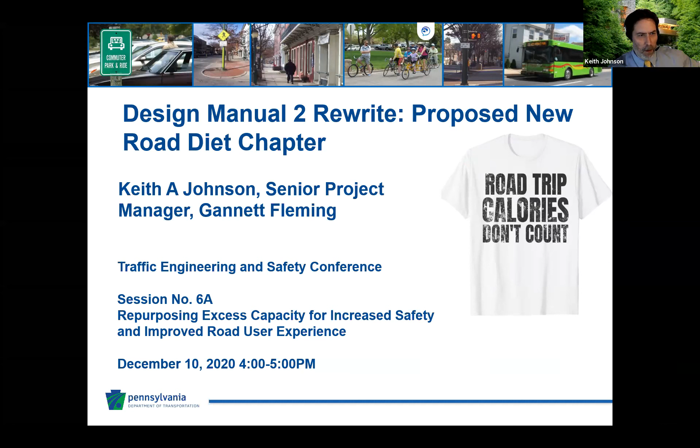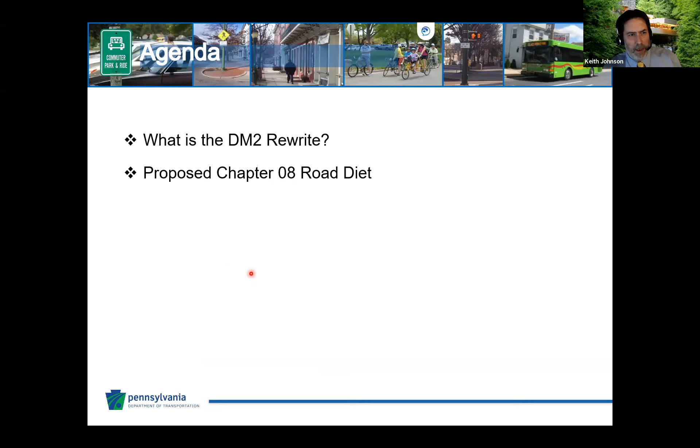My general agenda here for my presentation is, first I want to give you an idea of what the DM2 Rewrite is all about, and then I'll go over the aspects of the proposed new chapter with the road diet. I'll just forewarn anybody who was in the contextual session we had yesterday with Brian Shunk that this first part is going to be a slight regurgitation of what I went over yesterday, so if you want to hurry up and go get a drink for a couple minutes, my feelings won't be hurt here.

So first of all, what is the DM2 Rewrite? Most of you are probably working in Pennsylvania and know what the DM2 is all about. But for those of you that are from out of state and don't do much work in Pennsylvania, just to give you an idea, PennDOT has a manual. It is publication 13M, Design Manual Part 2.

We call it the DM2. This is the main design manual, highway design manual. It's probably the most used design manual of PennDOT's publications. What we are doing is a complete rewrite of the publication, not just an update, a rewrite of it. And as we do that, we will be putting that in what's called publication 13.

I talked a little bit about this yesterday, I'm sorry. 13M was created by PennDOT a few years ago, back when we were talking about converting over to metric, and that's where the M came from. So we had publication 13, and then we have publication 13M that has metric units in it. We didn't do that conversion, but we left the whole design manual in 13M, and we still theoretically have a publication 13. So we're going to just be putting the new chapters in there as we publish them.

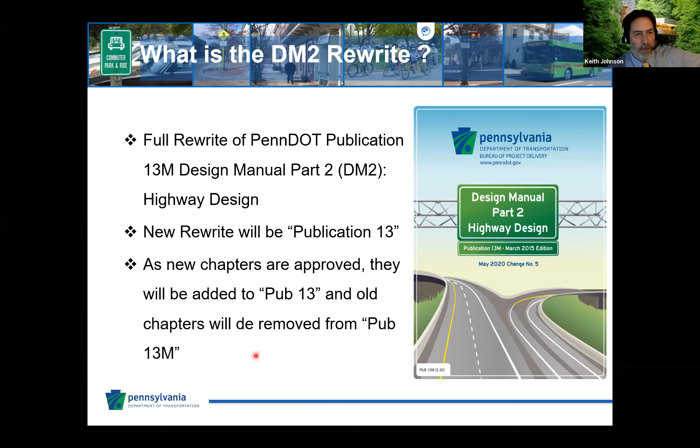And then in Pub 13M, we'll be putting a little note on that to refer people to Pub 13 for whatever chapter we're talking about.

So changes in the rewrite. Like I said, this is going to be a complete rewrite, just not an update. A couple things with all that. A couple of the major things we're going to be doing: we're trying to make the design manual more user-friendly, easier to read.

So with that, we're adding a lot of graphics, photos, call-out boxes for information. Every chapter is going to have a reference section right in front. So as you're working on a particular topic, we're giving you different references outside of PennDOT that you can look at to help you with your design.

Where needed, we're putting example calculations in. The aspect is we're not regurgitating what's in the AASHTO Green Book. We will refer to it, but we're not necessarily duplicating the AASHTO Green Book unless there's something really important we want to show.

And then as far as a lot of you, if you work in the DM2 right now, you might be looking at a certain topic and then you go to the Green Book and it's in a completely different chapter in a different section. We're trying to follow the flow of the AASHTO Green Book, so it's easy to go back and forth as you're doing your design.

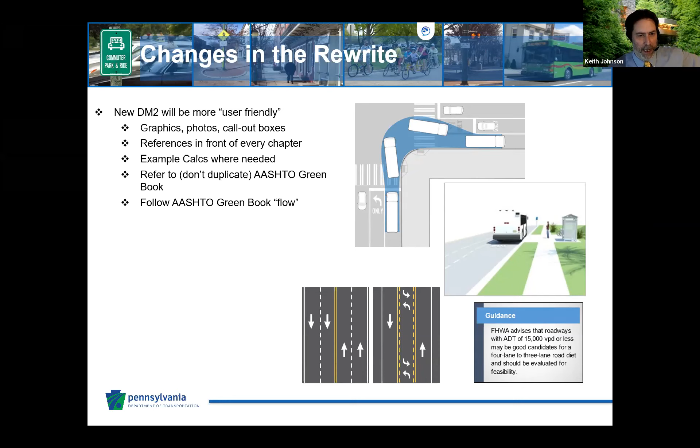In general, the philosophy of the design book is we're trying to add more flexibility for design. So when we need to give a hard, fast number, we'll give a hard, fast number, but we also are leaving things somewhat open so we can apply some engineering judgment to our design. And we're incorporating complete street concepts and context sensitivity into what we're doing.

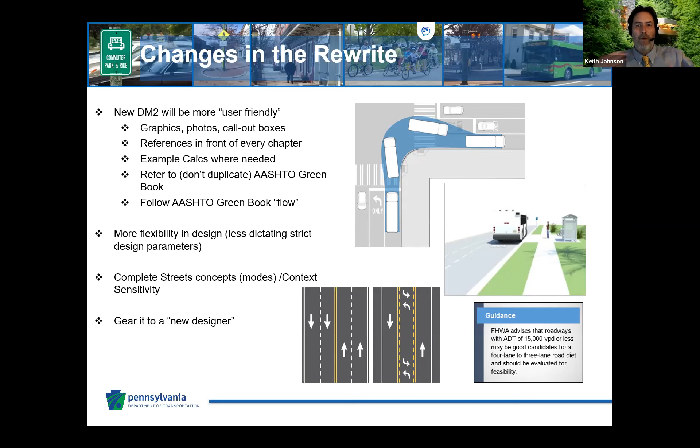And again, lastly, we're trying to gear this for what we're calling the new designer. We are going to have a lot of people retiring in our industry. We're going to have younger designers coming aboard, and we want to make sure we give them enough information so the design manual is helpful for them as they're doing their design.

This is the general layout of the new DM2 as we put this together. We have a total of 25 sections, 24 chapters. We have these in different types of sections. So we have a design guidance section right at the beginning, sort of telling the philosophy with context-based design and showing our design controls.

Project type specific - so we're breaking out our, basically our types of projects. We're going to have a new construction and reconstruction section, and then pulling out 3R and pavement preservation. A lot of times people are a little confused on what the difference is between reconstruction and 3R. And we're going to have a bridge project chapter.

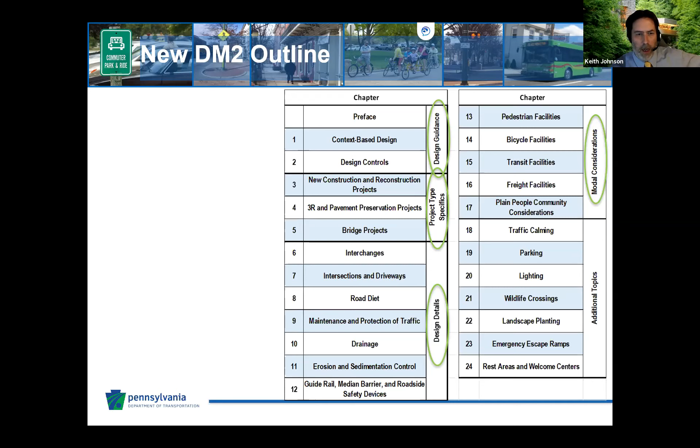We don't have a bridge project chapter now. That doesn't mean we're designing bridges in here - it's more the highway component of designing bridges. Next, we have design details, different aspects there, which we'll go over in a second. And then modal considerations - we're adding some new chapters dealing with the different types of non-auto modes out there. And then we have our additional topics section.

As far as the new chapters go, these are all the new chapters here. Like I said, we're breaking out 3R and bridge, the road diet, which I'll get into in a minute. We're going to have an MPT chapter.

And then again, we've added - right now the DM2 has nothing, maybe a paragraph or two on some of these topics - transit, freight. For those of you that aren't sure, Plain People Community, that's our chapter dealing with the Amish community and designing for horse and buggies, that sort of thing, and then a couple other new chapters.

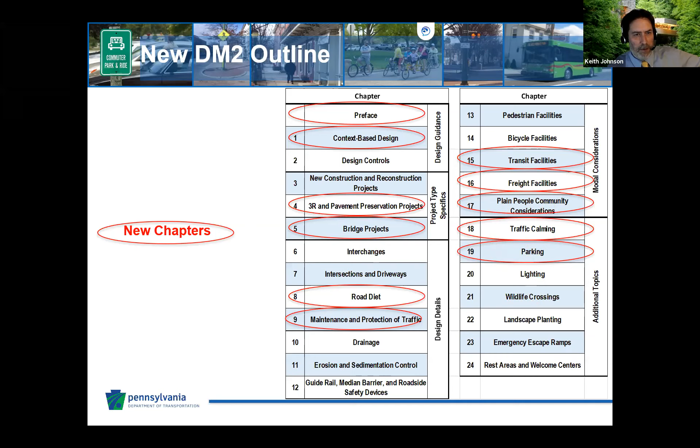And sorry, my phone's going off.

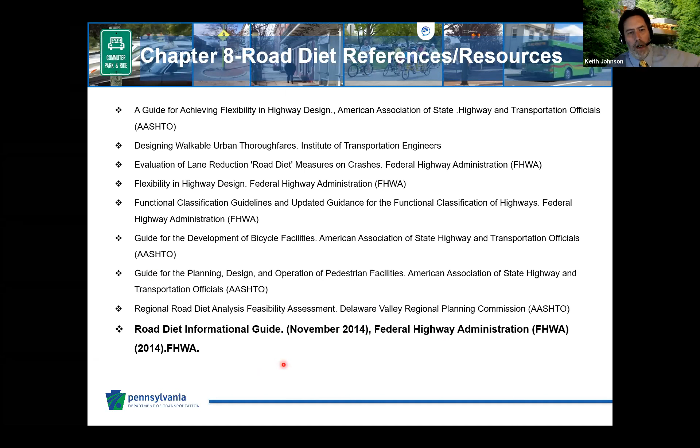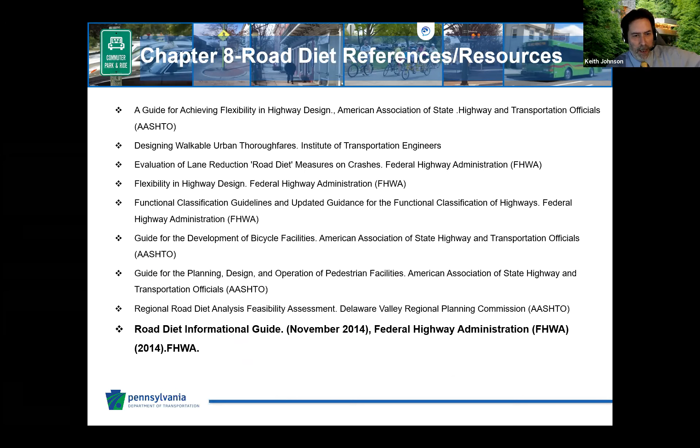This last one here that I highlighted, this is the main document we use to develop our road diet chapter - this is the road diet informational guide from Federal Highway. It's a good resource, and like I said, we modeled the chapter after what was in that document. So what is a road diet? Everyone has a different definition of what a road diet is about.

Road diet is generally described as removing travel lanes from a roadway or reducing travel lane widths and utilizing the space for other uses. This is our definition in our chapter.

So if we're reducing lanes, you might be reducing lanes to provide space for parking, pedestrian facilities like sidewalks, or bicycle facilities. Most road diets usually utilize a center two-way left turn lane, and we all see that acronym a lot.

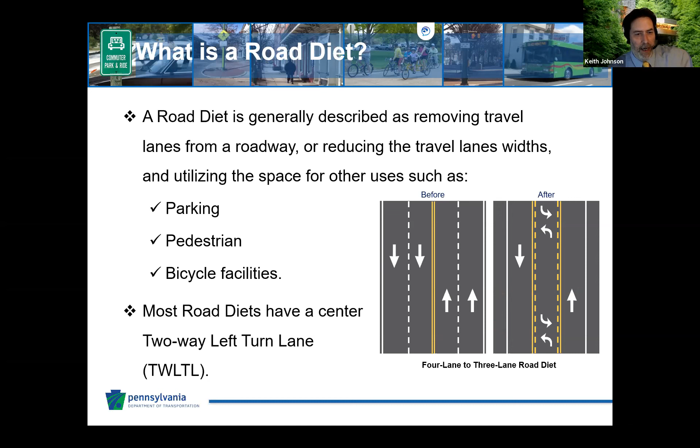The next configuration is a 4-lane to 5-lane. Same sort of concept here. In this case, we might be keeping the curb-to-curb width exactly the same, and narrowing the lanes to fit the two-way left turn lane in.

The next configuration is a 2-lane to 3-lane. Again, the same sort of concept, but with a 2-lane road.

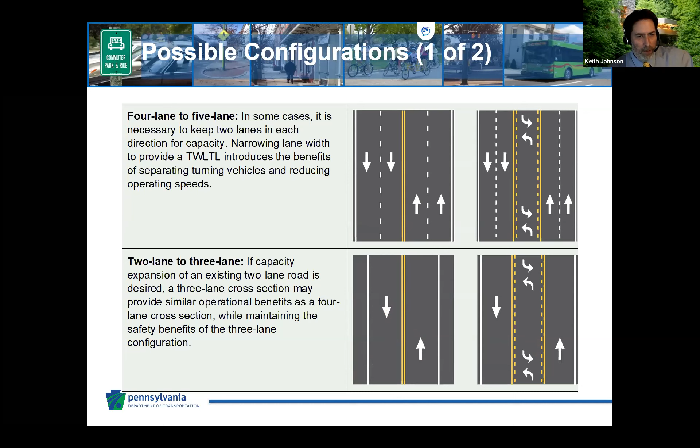Two other possible configurations: you stay with a 3-lane, but narrow the lanes because you want to do something on the side, like parking, sidewalk, or a bike lane. Lastly, we have a 5-lane to 3-lane concept, again with the idea of reducing the lane width to do some things on the side.

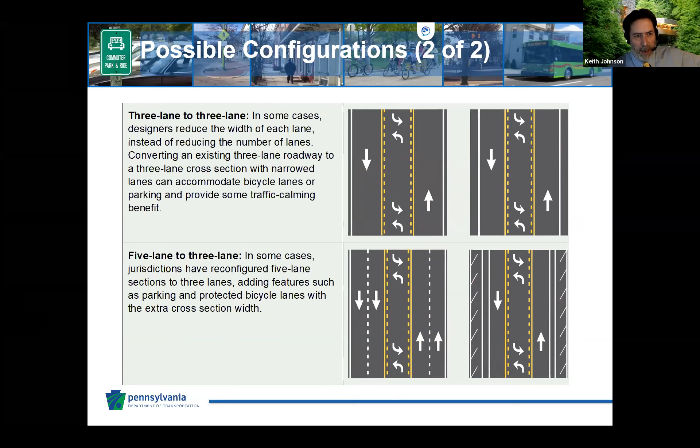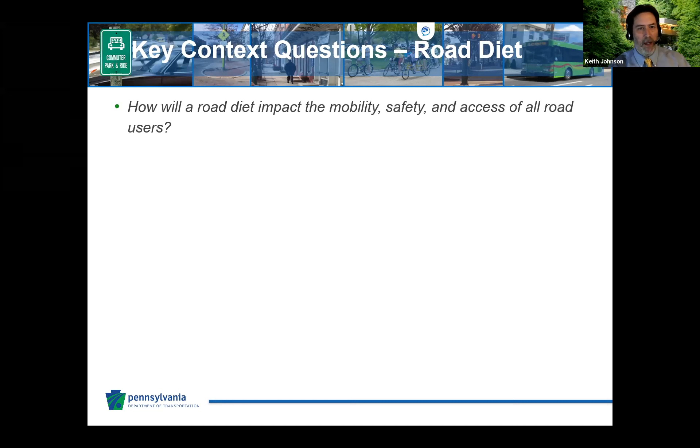So key context questions - in the DM2 update, we always have a section called context questions. These are questions we want the designer to think about as he's looking at his design. For the road diet, the first question is: how will the road diet impact mobility, safety, and access for road users?

A typical question here is about two-way left turn lanes. If you have a 4-lane road, is the roadway functioning as what we call a de facto 3-lane road, where the inner lanes are more or less acting as left turn lanes? Because of so much left turn traffic, especially in peak hour, on the existing 4-lane, it causes through traffic to just use the outside lane. So is that happening out there? You want to get a good idea of whether that's occurring or not.

Another factor is vehicle speeds greater than the context supports. If you're narrowing the lanes, it's shown that will reduce speeds. Sometimes we think if we just lower the speed limit, people will slow down - that basically isn't the case, but this is a good way of reducing speeds if it makes sense for the corridor.

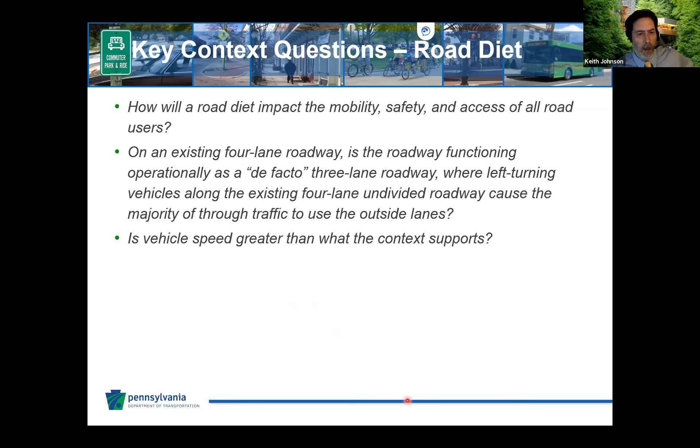Next is public perception of the corridor. We highlighted this, and it even came up when we were doing it. Usually we don't mention public involvement in the specific design manual, but you definitely want a public engagement function when doing road diets, because it can look somewhat radical to the public, and you want to make sure they understand what's going on.

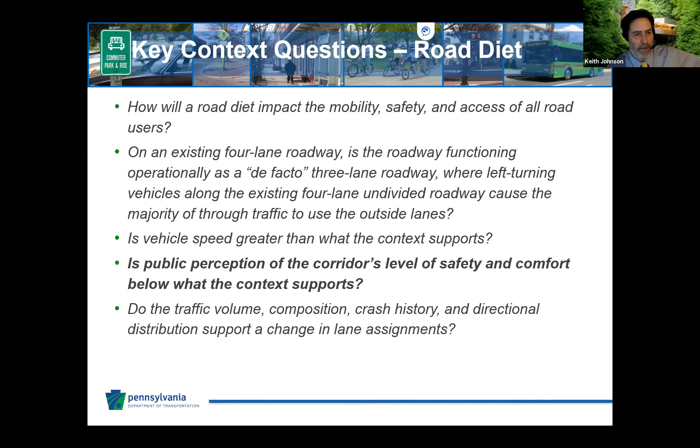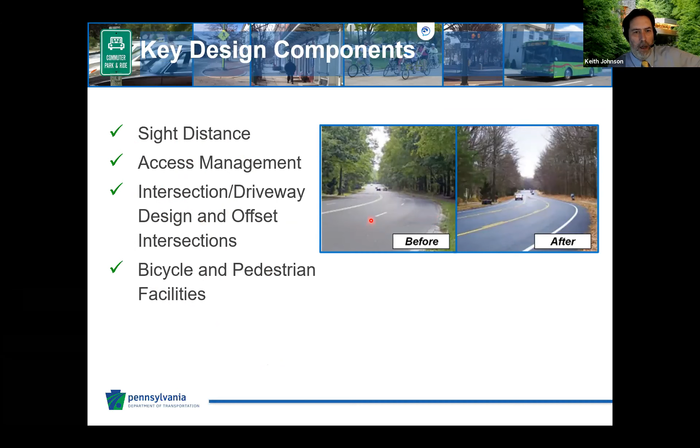Looking at different components: our key design components that we're flagging are sight distance, access management, how driveways and offsets work, and we want to include bicycle and pedestrian considerations. Sight distance is sometimes overlooked - you are changing the horizontal sight distance of the roadway, so you want to make sure you're looking at things like that.

As far as intersections - well, first let me hit design vehicles. We are talking about maybe reducing lane widths, so you want to get a good handle on what your design vehicle should be for this.

If truck traffic is somewhat light or there's not a lot of transit usage, going from a 12 to an 11 or a 10 can be doable. If you have transit, you want to watch that - usually we don't like lanes to be less than 11 feet for transit vehicles, since their overall width with rear view mirrors is about 10.5 feet. So if it's a major transit route, keep things like that in mind.

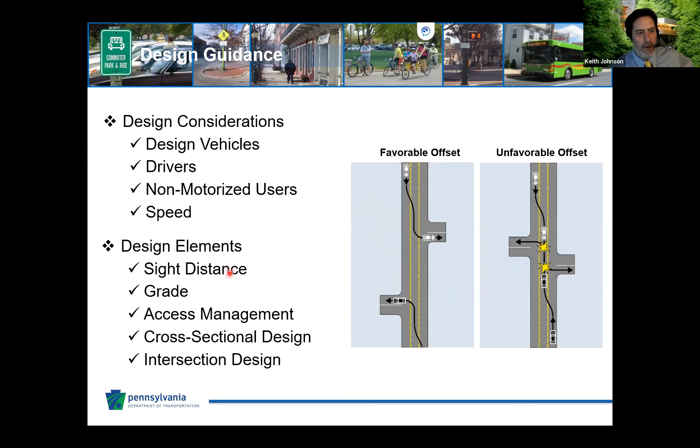Design elements. This is an example of intersection offsets you want to pay attention to. Obviously, you'd rather have this sort of situation as opposed to one where you could create conflicts with people coming in, so try to flag those elements in your road diet.

We're looking at improved safety here, especially if you have a lot of left turn lanes happening. Again, in these diagrams, wherever you see a little white spot, those are conflict points. So if you have a lot of left turns, putting in the two-way left turn lane reduces the conflicts. Same sort of thing if you have an unsignalized intersection.

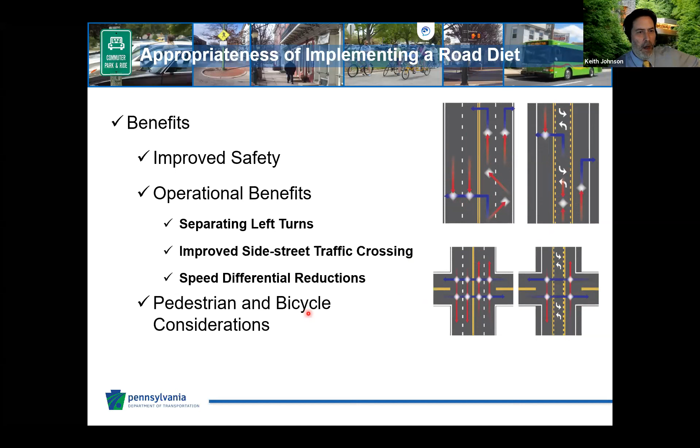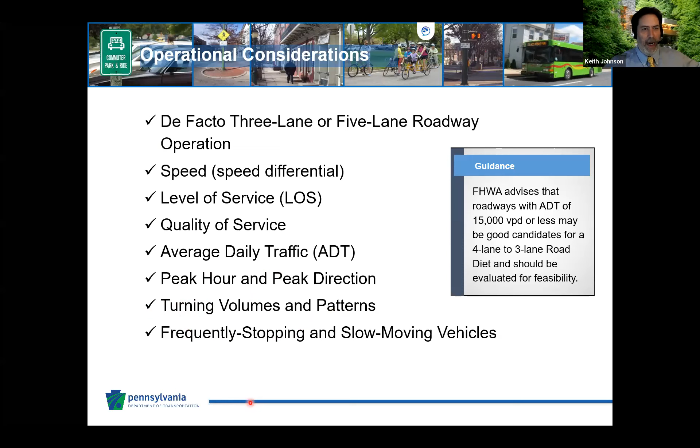Operational considerations: if you have a de facto situation happening from a 3-lane or 5-lane perspective, you want to look at that. Depending on how much traffic you have, you could have a level of service issue, so pay attention to level of service and ADTs. And as we talked about, especially with two-way left turns, you really want to get a handle on how much turning volume you have out there.

With this chapter, we don't have a lot of strict numbers saying if you have this, do that, because every road diet project is very unique, as you'll see with the example projects we'll go over. So you really want to avoid just looking at a straight number.

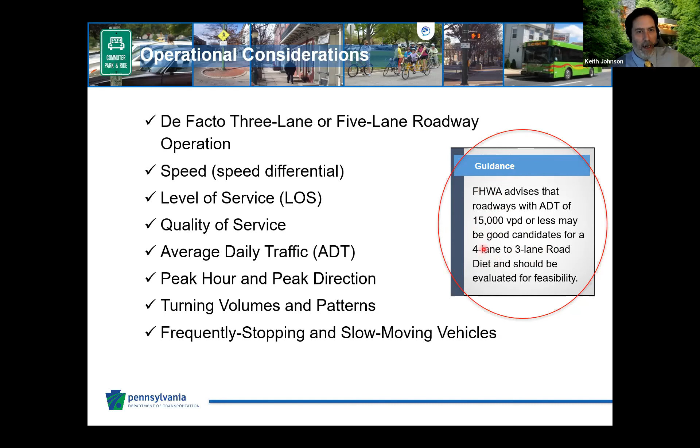We do have this guideline from Federal Highway: if you're around 15,000 or less, you probably have a good candidate for a 4 to 3 conversion. That doesn't mean if you have 20,000 you shouldn't look at it, but that's usually an indicator.

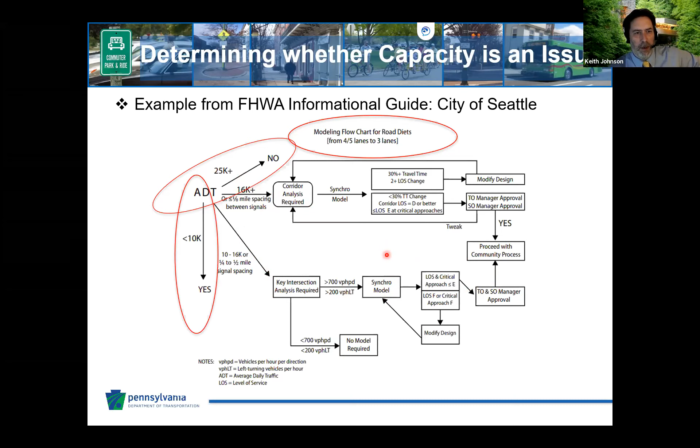This isn't in our chapter, but it's from our informational guide. This is an interesting thing Seattle did for determining capacity, again just for a 4-lane to a 3-lane. Their general rule is if you have over 25,000, it's just not going to cut it; if you have less than 10,000, you probably have no problem. The rest lays out how to look at this either from a corridor analysis or a key intersection analysis. I thought this is a nice model if you're approaching this, you might want to adopt this methodology to look at capacity.

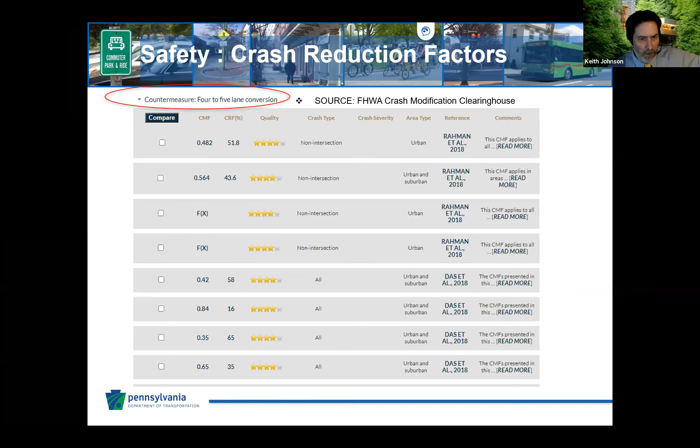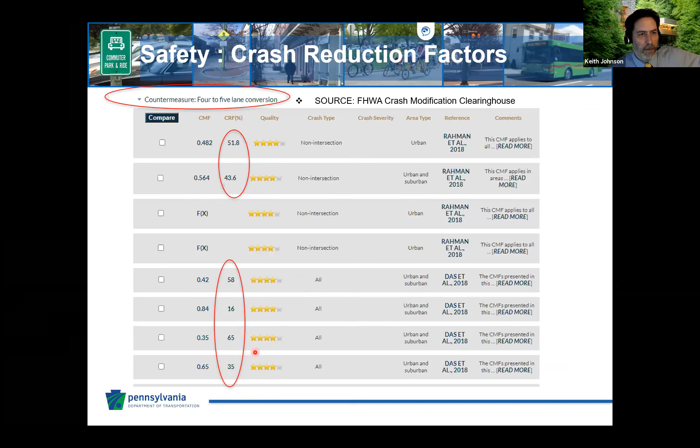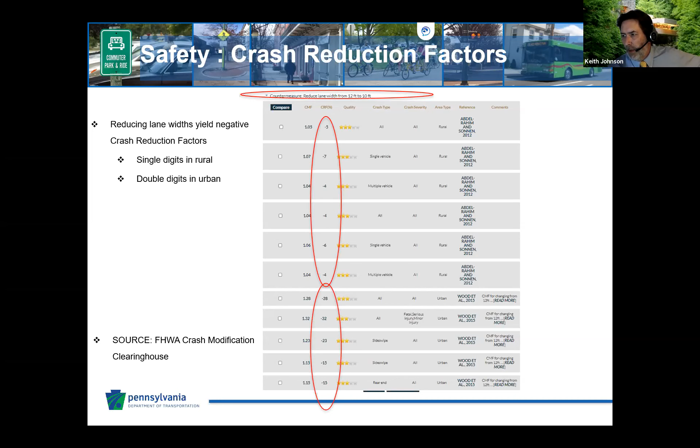I did want to flag, some of this talks about reducing lane widths, and I don't want everyone to think this is a panacea. If you're looking just at lane width reductions, you're getting negative CRF values. These here are for rural situations from the clearinghouse, and these down here are for suburban and urban situations—so you're getting negative, which isn't great.

However, the idea is if you're introducing a two-way left turn lane, you can offset these with the increased safety from that lane. In my mind, it's analogous to a stop intersection going to a signalized one—you might increase rear-end collisions, but you're greatly reducing head-ons and angle crashes. Overall, the severity of the crashes is reduced, so you can think of it the same way with road diets.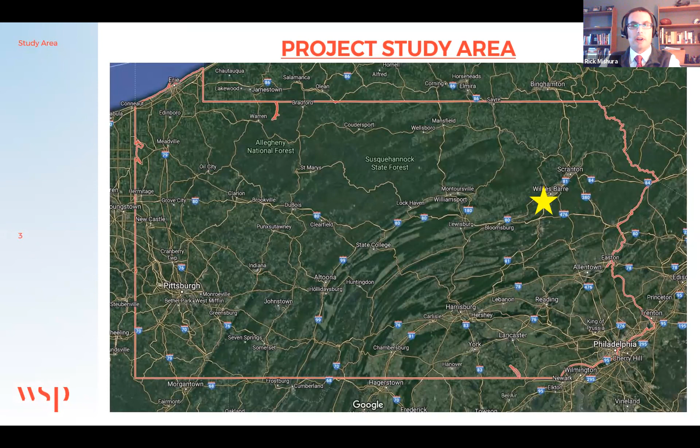This project is located in Northeast Pennsylvania in Luzerne County, PennDOT District 4, just south of Wilkes-Barre. The project study area is outlined in green.

The Sans Souci Parkway is 4.2 miles in length, an urban principal arterial, and includes 6 signalized and 6 unsignalized intersections. The entire limits are within Hanover Township, Luzerne County. Nanticoke is to the west and the city of Wilkes-Barre is to the east. SOUCI Parkway connects with I-81, the blue highlight in the lower right portion of the graphic, via PA Route 29, the red highlight.

The typology along the roadway differs across the corridor, from commercial on the western portion to residential in the middle, and then a mixture of commercial and light industrial on the eastern portion. Of interest is a railroad crossing through the easternmost signalized intersection.

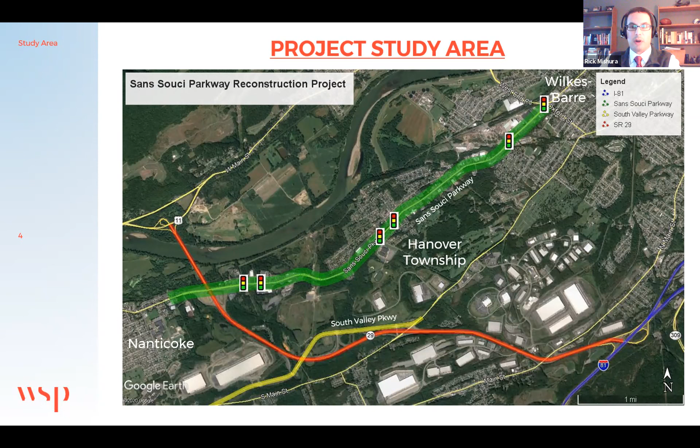Speed limit is predominantly 45 miles per hour within the study area and 35 miles per hour east and west of the study area. We are currently in preliminary design with an opening year of 2025 and a proposed design year of 2045. Additionally, the South Valley Parkway connection, highlighted in yellow, was completed in 2019.

The project purpose is to determine the typical section of the roadway based on all modes of transportation through PennDOT Connects. The picture on this slide depicts typical travel modes along the corridor, which includes no traffic congestion, few pedestrian amenities, and inadequate facilities for bicyclists.

Due to the wideness of the roadway, speeding is an issue along the corridor, as 75 to 80 speeding citations per month are issued by the Hanover Township Police Department. Of note is the person pushing a baby stroller in the roadway due to an absence of sidewalks.

Census tracts were reviewed in the area, which show that 13% of the population do not have access to a vehicle. This identifies a need to accommodate all modes of transportation. To begin to understand the corridor, the next few slides will showcase existing conditions, including volumes, crashes, and access management.

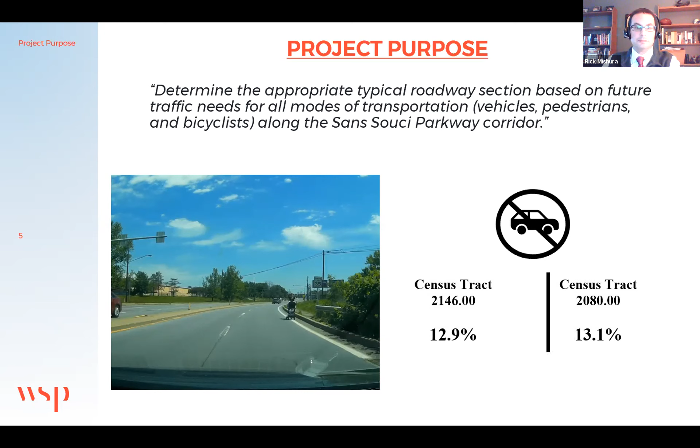These are the typical cross sections found along the corridor: predominantly a 4-lane section, 2 travel lanes in each direction, with turn lanes provided at select intersections. Shoulders vary from very minimal, about 1 foot wide, to 8 feet wide.

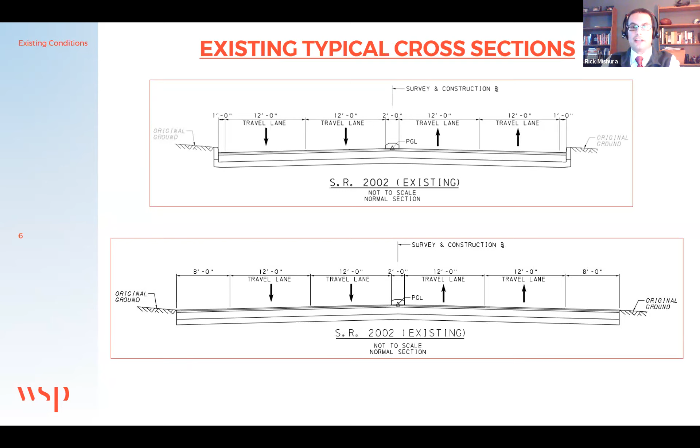Interestingly, the roadway transitions to a single travel lane in each direction, east and west of the study area, in Wilkes-Barre and Nanticoke respectively. Our civil design team is progressing with a 35-mile-per-hour design speed.

The latest ADT we collected in 2019, pre-COVID, showed a little over 12,000 vehicles per day. Based on the current ADT and FHWA criteria, the Sans Souci Parkway is a good candidate for potential road repurposing.

When developing future volumes, we contacted the Lackawanna Luzerne MPO for growth factors in the area. Unfortunately, none were available. PennDOT growth factors per county were referenced, which initially showed 0% for urban, non-interstate. Since we were proposing a lane reduction along the corridor, we used a conservative total growth of approximately 11% to the future design year of 2045.

This growth accounts for additional potential developments south of our study area with the recent construction of the South Valley Parkway.

Along the eastern section of the corridor, there is a high number of mid-block pedestrian crossings occurring between the light industrial warehousing land uses and subsequent parking lot and commercial properties on the other side of the roadway. The upper left photo shows its current crossing. The picture on the right illustrates that more than 400 pedestrian crossings are occurring here during a typical weekday. An additional concern was a pedestrian fatality that occurred here.

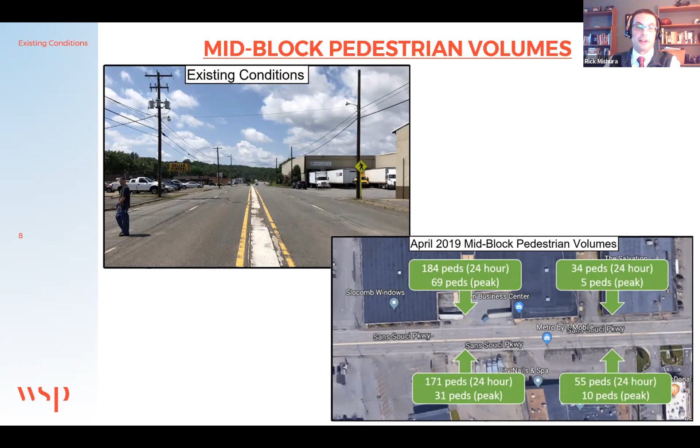A common theme along the Sans Souci Parkway is the lack of access control, with many cases having no defined driveways. In this photo, the color-coded parcels on the north side of the roadway have no designated driveways, as the entire frontage can be accessed from a driver. This, coupled with no center turn lane, causes vehicle conflicts.

Access management was reviewed along the corridor, specifically for accordance to Pennsylvania Code Title 67, Chapter 441, which states that one driveway will be permitted for a residential property and not more than two driveways will be permitted for a non-residential property. If the property frontage exceeds 600 feet, the permit may authorize an additional driveway. New HOPs are expected as part of this project.

The benefits of access management include improved movement of traffic, reduced crashes, and fewer vehicle conflicts.

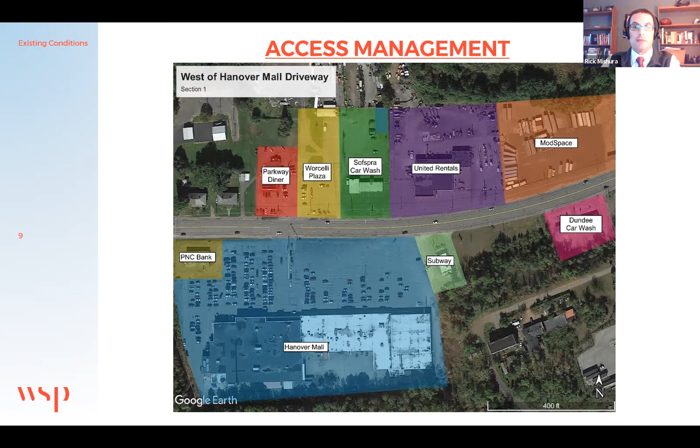The latest 5 years of crash information was obtained, years 2013 through 2017, analyzed and plotted. 213 total crashes occurred during this time frame, and 5 fatalities, including an additional fatality in 2018. 3 of the fatalities included pedestrians.

Not surprisingly, signalized intersections and horizontal curve alignment highlighted high crash locations. The intense red area in the upper right of the graphic highlights a section with high conflict of vehicles due to poor access management and conflicts with pedestrians and vehicles.

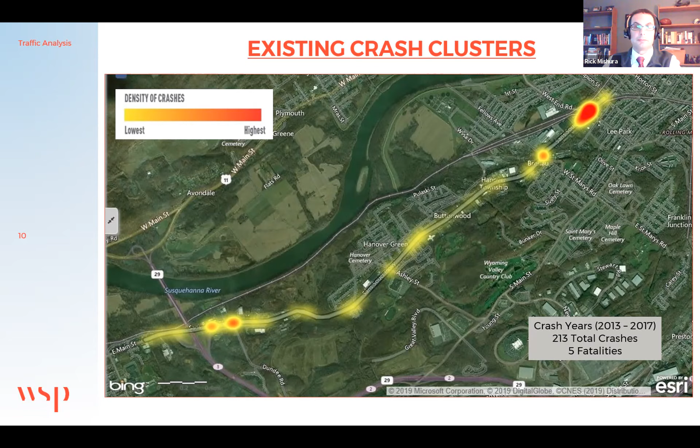When preparing our preliminary traffic report, these are a few of the traffic analyses performed, which we will further discuss today. 4 scenarios were analyzed.

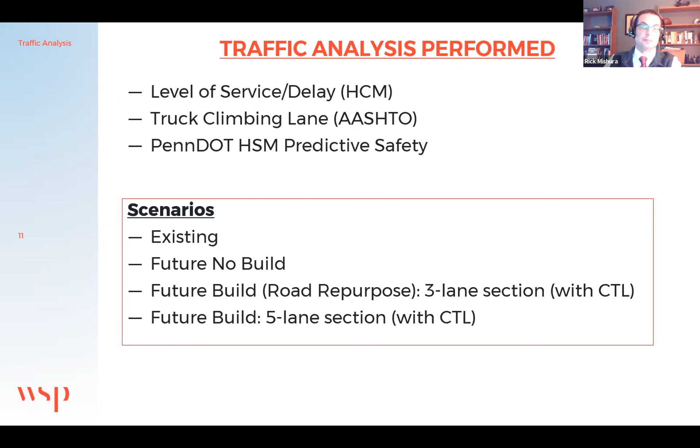4 peak hours were reviewed: weekday AM, midday, PM, and weekend Saturday. As Hanover Area Junior Senior High School is on the corridor, the midday peak was included, along with an extended PM peak hour to catch volumes during the school dismissal times.

Synchro-SimTraffic was utilized for all scenarios, and our metrics included intersection and arterial level of service, travel time, and projected queues at the intersections. For SimTraffic simulations, 10 runs for each scenario were averaged and provided in the results table.

As illustrated earlier regarding the volumes, the corridor would operate successfully with the lane reduction, as noted by the arterial level of service and an increase in travel time of only about 20 seconds. No issues with intersection level of service and queues are expected.

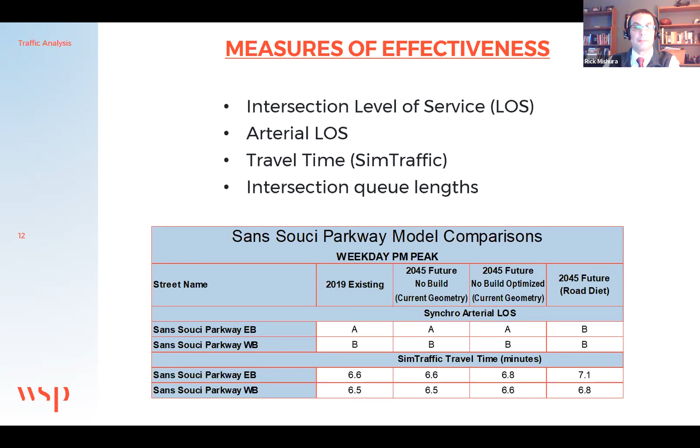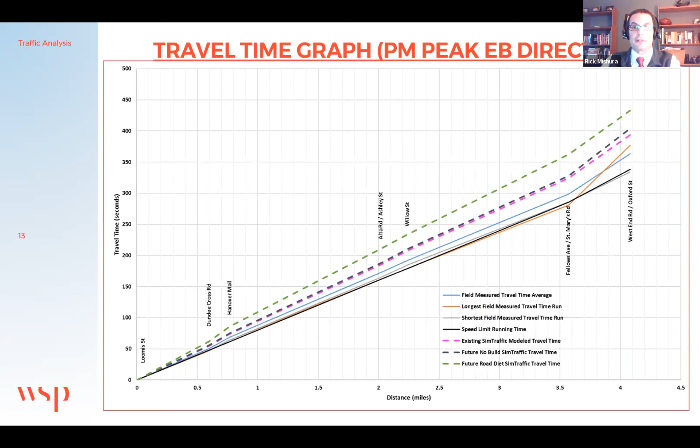This was one of the many travel time graphs illustrated in our preliminary report for all scenarios proposed. Of note is the dotted green future lane reduction scenario compared to the dotted black future no-build scenario. The biggest increase of travel time with the road repurposing was approximately 20 seconds.

An additional analysis performed was for truck climbing lanes. There is a crest of a vertical curve in the middle of the project area. When looking at an alternative to reduce the cross-section to a single lane in each direction, a truck climbing lane analysis was conducted for necessity.

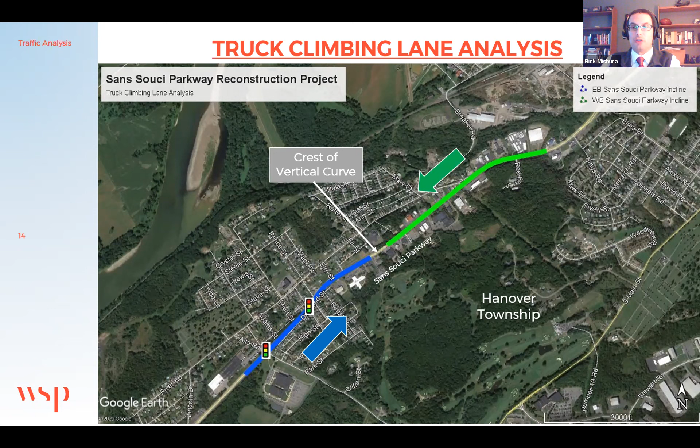The eastbound section highlighted in blue has an average grade of 3.3%, while the westbound section highlighted in green has an average grade of 4.3%. Chapter 2 of the PennDOT design manual was utilized in the analysis and summarized in the next slides.

3 criteria are outlined in DM2 and should be satisfied to justify a climbing lane, which is summarized in this table. Criteria 1 is an upgrade traffic flow rate more than 200 vehicles per hour. Criteria 2 is an upgrade truck flow rate more than 20 vehicles per hour. For criteria 3, one of the following conditions must be met.

A: a 10 mile per hour or greater speed reduction is expected for a typical heavy truck. B: level of service E or F exists on the grade. And C: a reduction of 2 or more levels of service is experienced when moving from the approach segments to the grade.

The first 2 warranting conditions consider the volumes of vehicles and trucks traveling the roadway. The number of vehicles and trucks must be sufficiently high to cause measurable delay due to crawling trucks.

DM2 references the AASHTO Green Book for criteria 3A, which provides graphs for critical lengths of grade along curves, for a 10 mile per hour speed or greater speed reduction. HCS was utilized for criteria 3B and 3C. Per the analysis, a truck climbing lane is warranted and was incorporated into the design.

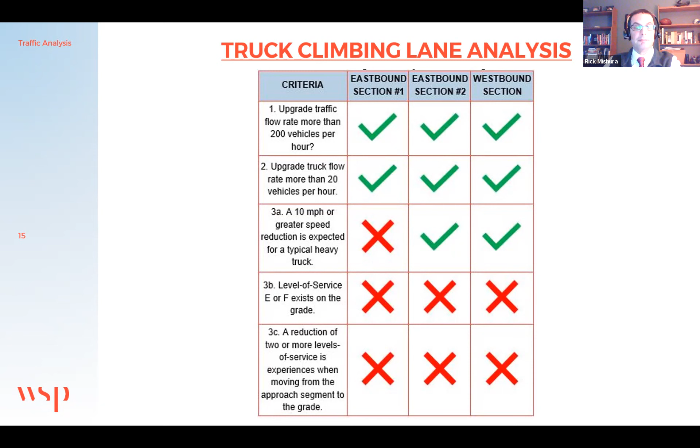A predictive safety analysis was then performed in order to determine the correct analytical method.

FHWA's scale and scope of safety assessment methods in the project development process was referenced. Due to the significant geometric improvements planned for the corridor, the project is considered a project type 4R. Because of this designation, this led to the determination that our analysis should utilize an SPF with CMF adjustments.

PennDOT Publication 638A, the Pennsylvania Safety Predictive Analysis Methods Manual, was followed.

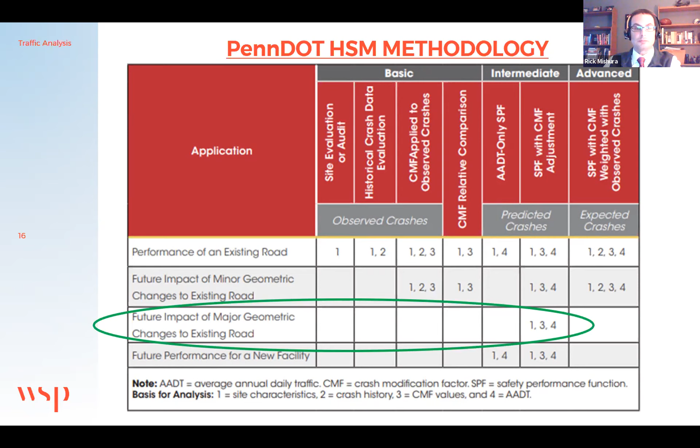We acknowledge that the CMFs in Keith's earlier presentation show that restriping a specific four-lane undivided roadway with the center turn lane generally leads to a reduction in crashes. But when examining all roads on a statewide level, PennDOT has found that a five-lane roadway, including a center turning lane, has more crashes than a four-lane undivided highway.

Based on the safety comparison, the three-lane section option, which includes a center turn lane, is predicted to be the safest cross section.

The crash results were quantified and a benefit cost ratio for the two alternatives was provided. Cost per fatal and injury and property damage only crashes were summarized for each option in total for comparison. A benefit was calculated in comparison to the existing section, and then a benefit cost ratio was calculated based on the infrastructure cost.

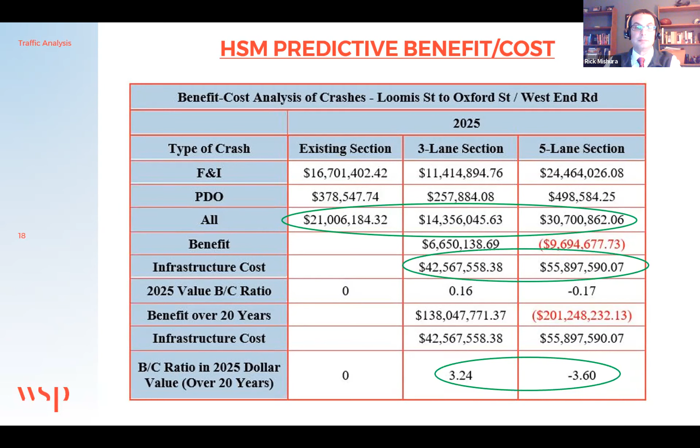When it was time to get together for our stakeholder outreach in July of 2020 this year, it was impossible to have it in person due to the COVID-19 pandemic. The meeting occurred virtually with PennDOT, Hanover Township, and the legislators.

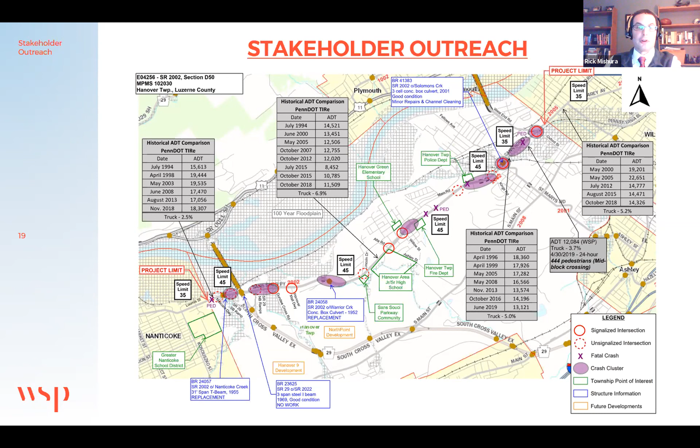As mentioned, we are currently progressing through preliminary design. One of the main things from a traffic perspective will be to conduct intersection control evaluations to help determine the best control option at each intersection.

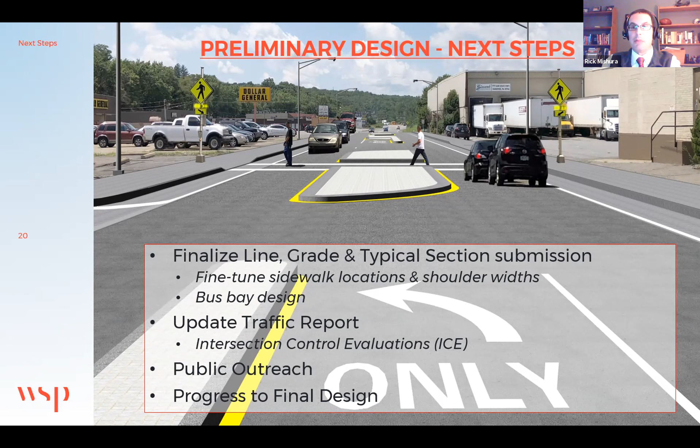Since the preferred alternative is the three-lane section, we'll be limited to options on signalized intersections or roundabouts. The image shown here is a concept of a potential alternative with a rectangular rapid flashing beacon for the mid-block crossing at the eastern end of the project.

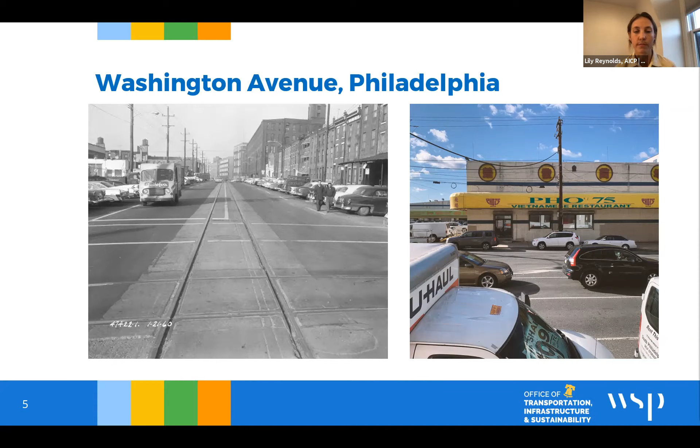This project has been looked at for several years in different phases, and really we are relooking at this corridor because it is scheduled to be repaved next year in 2021 between Grays Ferry Avenue to the west and 4th Street to the east. This resurfacing project really gives the city the opportunity to do more than just repave the roadway and create a more safe and accessible corridor.

This project evaluated, as I said, alternative roadway configuration concepts, and we conducted analysis with WSP, including impacts of traffic operations, to form the preferred concept.

So this was definitely one of the project goals, as well as decrease weaving, speeding, and aggressive driving. These are some of the most consistent driver behaviors on the corridor that we also see in some of the crash data. We also wanted to keep cyclists safer by separating them from moving traffic.

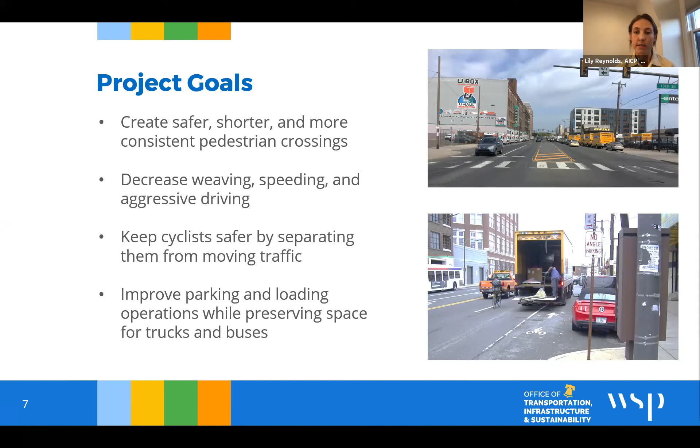So we wanted to address that, protect the cyclists, and also sort of rationalize and improve the parking and loading operations while preserving space for trucks and buses, as there is a SEPTA bus route, the number 64, that goes along this corridor.

Improving safety was really important for us. This is part of our Vision Zero portfolio of projects. So we looked at a longer time period than the standard 5-year crash window, because the city has been looking at this project as early as 2012.

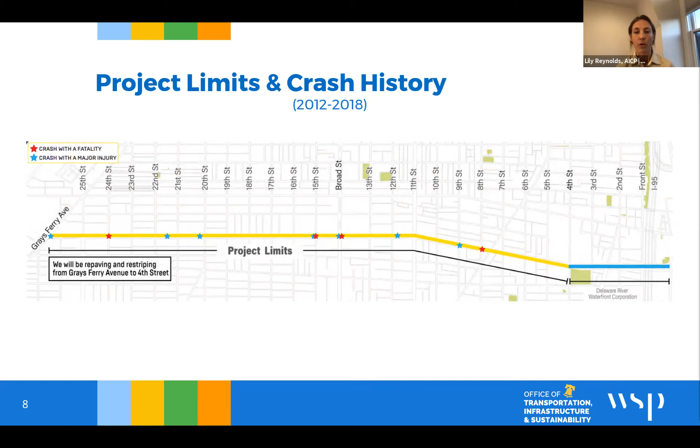John? Okay, all right, thanks, Lily. As Lily mentioned, I'm John Federico. I was WSP's project manager for this. I'm going to quickly go through the layout options that we worked to develop with the city, as well as the following analysis.

Before I do that, I just want to give a little more context on the corridor itself. Our project limits are just under 2.5 miles long. It includes 22 signalized intersections with each of the numbered side streets. We conducted traffic counts in April of 2019 and found that the average daily traffic was a little over 23,000 vehicles, and the posted speed limit is 30 miles an hour.

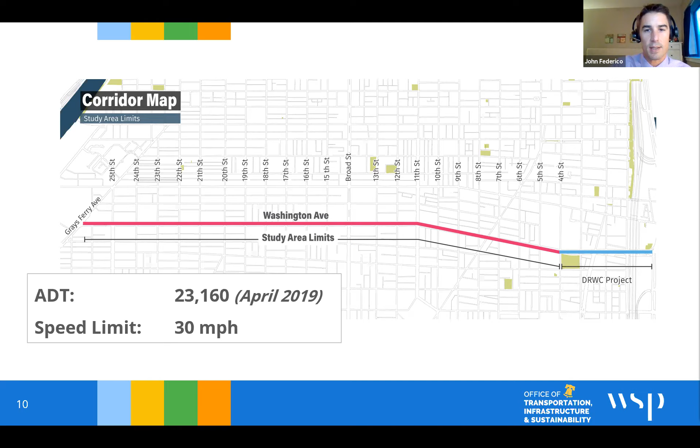Here you can see the existing cross section, which includes 2 travel lanes in each direction, a 2-way center turn lane with left turn lanes at the signalized intersections, a conventional bike lane adjacent to a parking lane, and then sidewalks that are 8 to 12 feet wide.

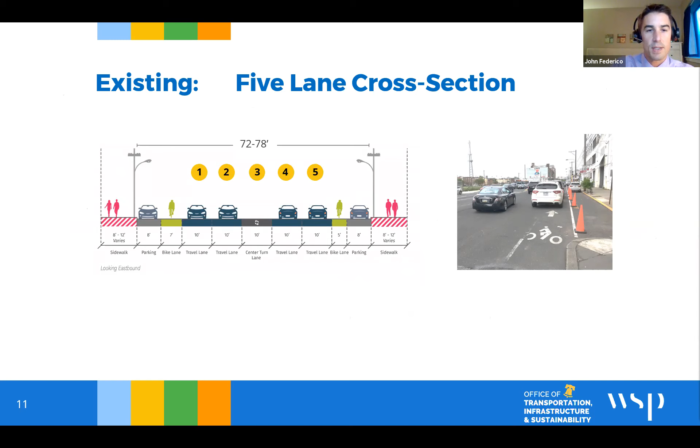Okay, and then to address the project goals that Lily just reviewed, we developed 3 reconfiguration alternatives for the road. The first one, probably the most straightforward, is what Keith mentioned as a 5 to 3 lane road diet. So what this would do is reconfigure the road to show the cross section in the bottom left, which would result in 1 travel lane in each direction.

It would retain the center 2-way turn lane, but it would use that extra space to essentially flip the parking and bike lane and create a parking protected bike lane. This would help to meet the project goals by dramatically reducing the effective distance that pedestrians have to cross between the parking lanes. It would provide that parking protected bike lane, eliminating double parking conflicts.

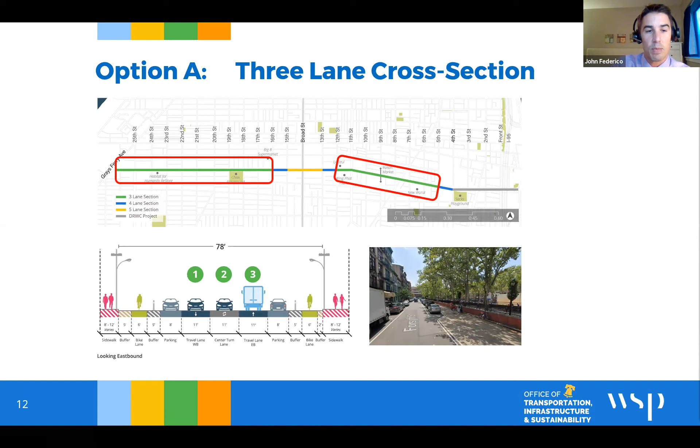And interestingly, in some parts of the corridor, this would also provide some space to widen the sidewalks where they're narrower. In the short term, since this is a repaving project, that could be done with textured or painted surface as shown in the bottom right photo. But in the longer term, there's the potential to maybe widen them out with development or capital projects.

Now, the next option is what we were calling a 4-lane cross section, or an unbalanced section. This would have 1 lane away from Broad Street and 2 lanes in the direction towards Broad Street, and retain the center turn lane. The reason for doing that really has to do with increasing auto driving capacity in this option and accommodating where there's the highest vehicle traffic flows. It would also provide enough room to create a parking protected bike lane, but it wouldn't have the space to provide those widened sidewalk areas.

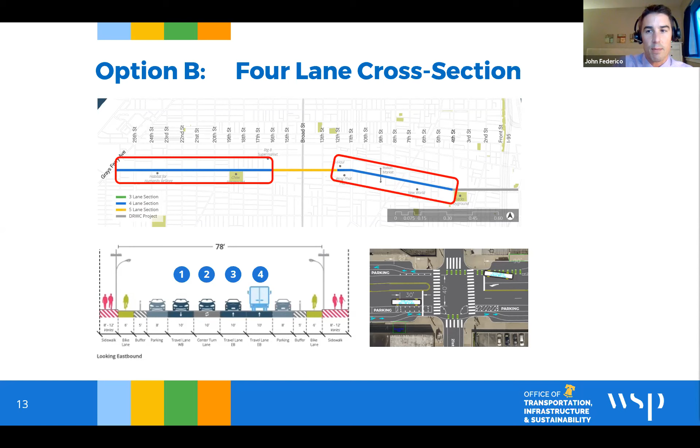The benefits of this option are that it would help from a travel time and traffic modeling perspective, but it doesn't help with pedestrian crossing and addressing some of the project goals related to safety, because you'd still have that multi-lane section with aggressive driving in one direction.

The final option is what we were calling a mixed cross section, essentially a hybrid of the other two options. It applies the 3-lane section toward the edges of the corridor where volumes are less, and the 4-lane cross section closer to Broad Street. It would have a mix of benefits depending on which section you're in.

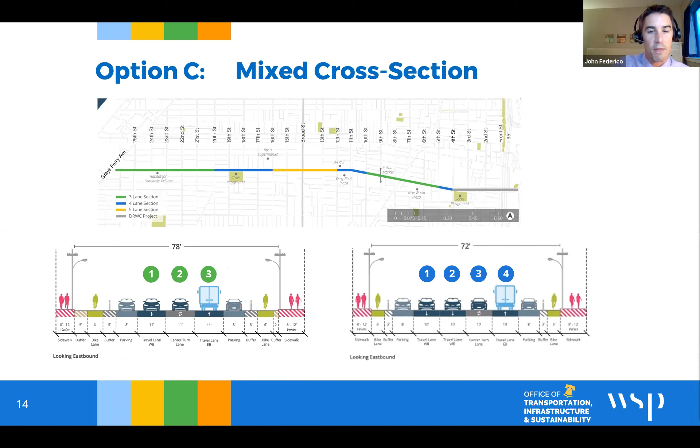I want to highlight that parking and loading analysis was critical and integral to all of these options. Currently there's a lack of regulations on parking and limited regulations on loading, combined with insufficient loading zones, which led to very low turnover throughout the corridor and frequent double parking, sidewalk parking, and median parking. Early on we realized addressing the double parking issue and lack of turnover was going to be integral to making any of these options function.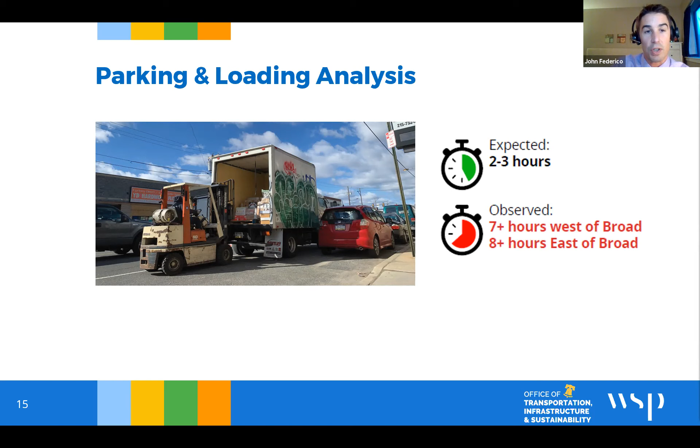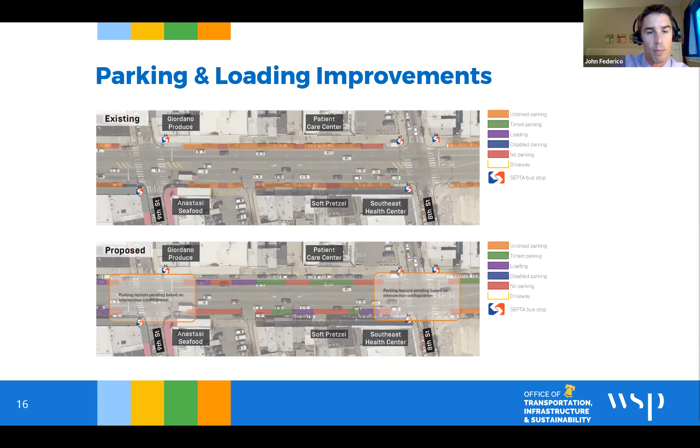We don't have a lot of time to get into it today, but we did a parking and loading analysis and came up with improvements, including strategically adding loading zones in front of businesses where they're most needed, as well as adding timed parking regulations and new loading regulations to the corridor. We worked with the cities and businesses to develop block by block plans for those improvements.

Now I want to get into the traffic modeling. The key next step was modeling these options to address questions from the city, public, and stakeholders. This was particularly important since the ADT was at that higher threshold of a road diet application, so we needed detailed analysis to see how this corridor would function under each option. An important part of that analysis was understanding the potential for diversion, since we're in a network in an urban environment.

There are a couple key questions. First, are motorists using Washington Avenue to access Center City and bypass congestion on the regional highways? We used streetlight data to conduct an origin and destination analysis and look at what percentage of vehicles are entering Washington Avenue from the regional highways, perhaps using it as an alternative cut-through or diversion route to Center City. You can see here one example using I-76.

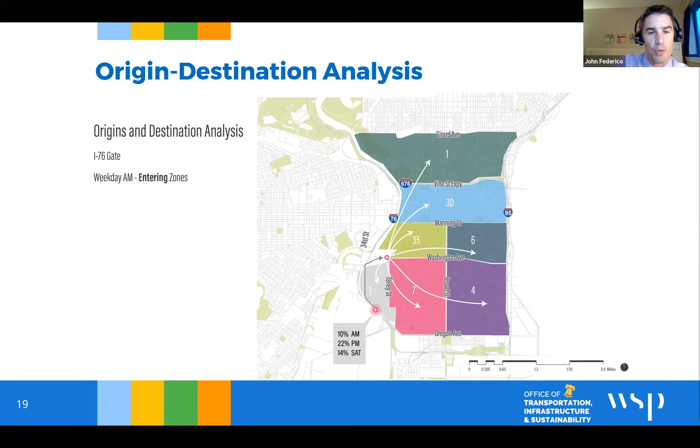We found a relatively low number of commuters were using Washington Avenue to access Center City, shown in blue there—about 30 vehicles in the AM. Extrapolating that analysis to the other highways, we found the same. So our conclusion was that there was limited potential for it being used as a diversion route, or for diversion from Washington Avenue back to the highways.

The second question is trying to understand, once vehicles enter Washington Avenue, do they travel the length of the corridor? Are they using it as a crosstown route, or are they really using it for shorter trips and turning off at specific locations?

Using streetlight data's top route function, you can see the pink line shows eastbound traffic. Heading eastbound from Grays Ferry Avenue by Broad Street, about 50% of the volume had dropped off, and by Columbus Boulevard we were down to less than 10%. In the westbound direction it was even more pronounced, with 50% of volume dropped off by 5th Street, and under 10% through the rest of the corridor.

This showed that less than 5 to 10% of vehicles were using Washington Avenue to travel the whole length—it's used much more by local vehicles for shorter trips to access businesses and destinations along the avenue. Based on the OD analysis, combined with research on similar road diet applications in other urban contexts across the country, we estimated that between 0 and 10% of existing traffic on Washington Avenue would divert to other roadways, depending on which layout option was implemented. The 4-lane option, with the greatest capacity, would have little to no diversion, whereas we assume the 3-lane option would have the highest, or 10%, diversion.

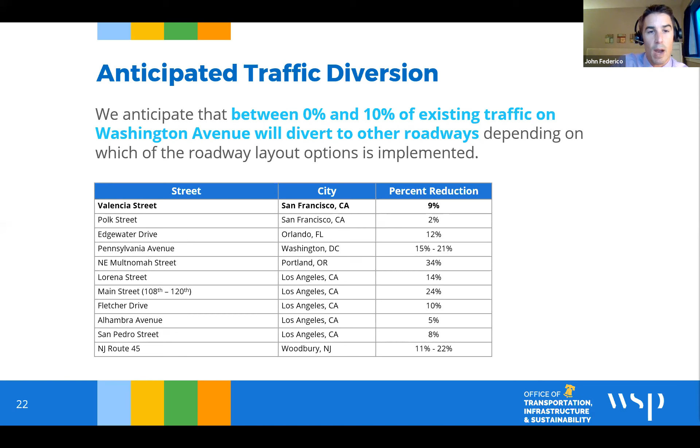Our next step was to analyze these options in Synchro and also use SimTraffic. Our measures of effectiveness included arterial level of service, corridor travel time, as well as simulation runs in SimTraffic.

The table on the left shows the results for the PM peak along Washington Avenue. We found that the three options shown in blue all maintain the corridor level of service. In terms of travel time, we saw an increase that varied between the options from 1 to 2 minutes, but that's over the length of the corridor.

Realizing from the origin-destination analysis that a lot of vehicles were making shorter trips, most motorists would probably see less than a 1 minute travel time increase, even with the highest option.

What was also really important to stakeholders and neighborhood groups was understanding how this would affect parallel routes and streets through their neighborhoods. So we conducted traffic counts along major parallel routes, including Christian Street and Ellsworth, and ran key intersections in Synchro to see the effects if all the maximum diverted traffic went to those routes. We found some increases in delay, but it was relatively minor, about 9 seconds at the worst intersection and only a couple seconds at the others.

Putting all this together, based on these results, the city felt comfortable going to the public with all three options to get their input and use that to aid in the decision-making process. With that, I'll turn it back to Lily to talk about that process.

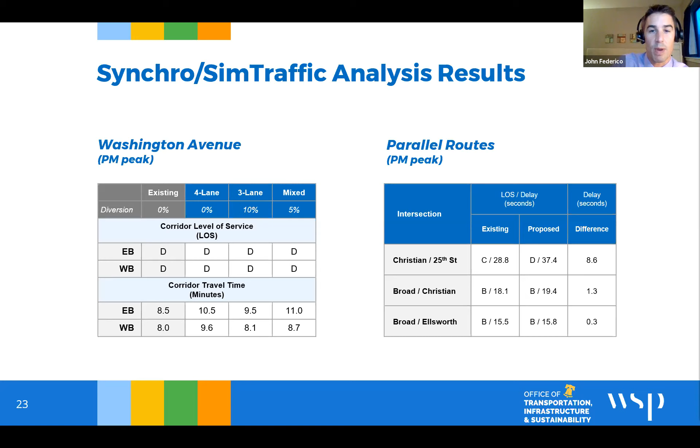Thank you. John's exactly right. We were looking at these three different roadway layout options and could see we were weighing the benefits and drawbacks of each, so we decided to turn that decision-making process into something more transparent and ask for input from folks who use the roadway more frequently.

We took all three options out to the community and planned a lot of public engagement for March through early summer this year. Like Rick mentioned with his project, we had to pivot all of our community engagement to be virtual. We were able to meet with 22 local community organizations, reaching over 160 people through Zoom meetings as people adapted to this virtual reality.

We also mailed postcards to near neighbors, 5,400 postcards, letting them know about this process and giving them a way to provide their input.

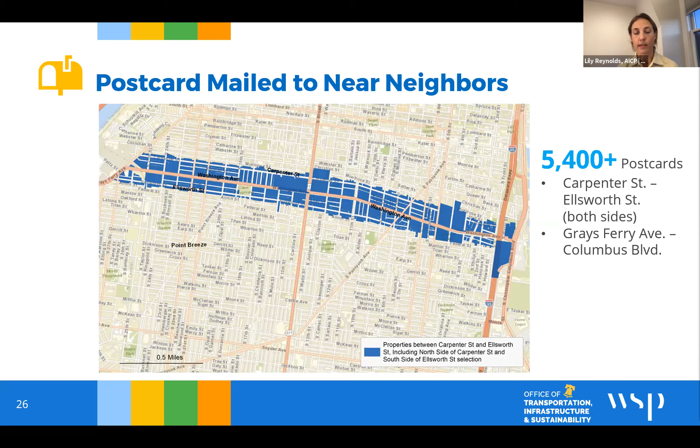We put the word out on social media, getting over 68,000 impressions on our own channels over roughly a 6-week period.

We also got the word out through the press, ending up with 15 media mentions. We did interviews in citywide newspapers, regional newspapers like the Inquirer, and hyper-local news sources like Philadelphia Latino or South Philly Review.

We recorded ourselves talking about the three different layout options and the things John went through, like travel time and diversion rates, and the different safety improvement benefits from a pedestrian, cyclist, and driver standpoint. We recorded those videos and also translated them into Spanish, Vietnamese, and simplified Chinese because of the different language groups used in these neighborhoods.

We ended up getting over 11,000 unique video views during the public process. We also used an online platform to create a survey so people could give us their input, and about 5,400 people took the time to give us their thoughts.

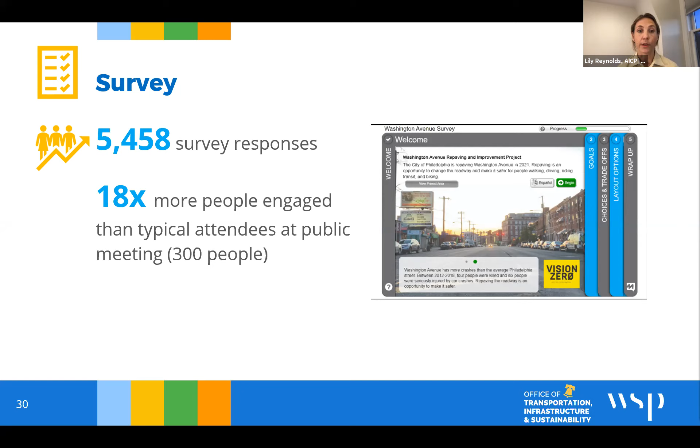Looking back at what we'd planned before COVID, hosting a couple of open houses, we found we reached about 18 times more people through these methods, just through the survey alone, not to mention all the other methods I mentioned.

The results were quite surprising, actually. We had an option for people in the survey to rate each of the roadway layout options, as well as many other questions we don't have time to go through. We saw that 71% of people who gave input rated the 3-lane option either 4 or 5 stars, the highest rating. These numbers don't add up to 100% because they could rate each option independently.

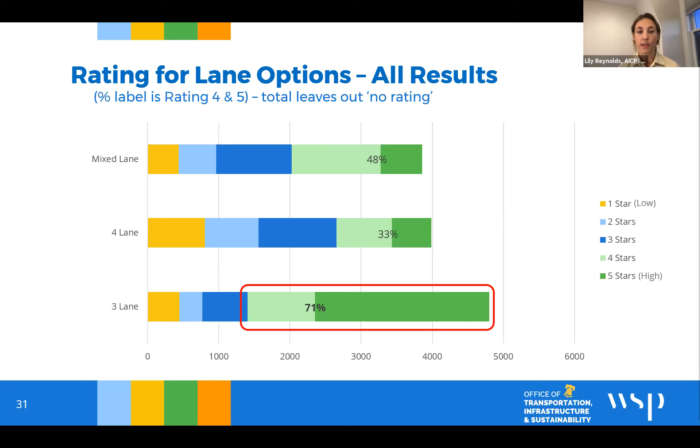It's pretty clear both from the citywide results as well as when we disaggregated the data by local zip codes that this was the clear preference. So based on that, we're moving forward with design for the 3-lane option, and we're reviewing block by block parking and loading regulations, developing pavement marking and signage plans. It's really important for us to continue regular communications leading up to the paving project, during construction, and even afterwards, to continue the understanding that the community has about the safety benefits of this project. Thanks very much.

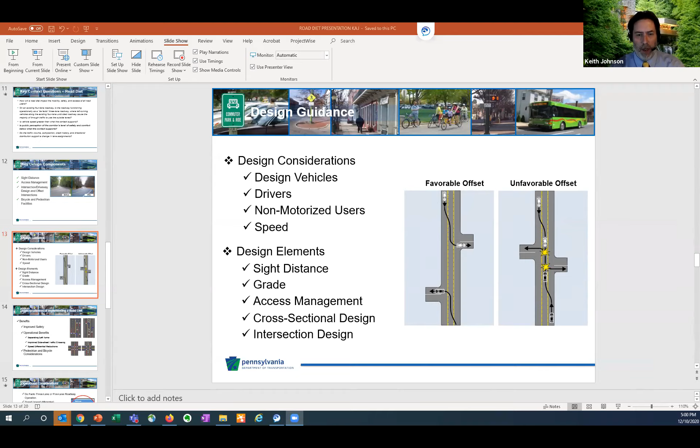I'm just going to pull that up to make sure it's clear what I was talking about. The offsets I'm showing here, it's not so much the distance between the offsets, but how they're arranged. In the favorable arrangement, if you're going northbound, you have the left offset and then the right offset. You don't want a situation where you have them opposite. That's more or less what we're flagging. As far as the distance for offsets, the short answer is no, we don't have any specific recommendations on what the distance should be. That would be a function of speed and other factors, but I just wanted to clarify what we meant by the offset in the graph.

Okay, another quick one for you. Are the context-based questions in design manual 2 programmed in any way? Because otherwise they can just be disregarded.

Yeah, I'm not sure exactly what that means. I'm not sure what 'programmed' means, so I'm not sure how I can answer that one. If the attendee wants to contact us through the conference and explain what they meant by that, I could follow up. Definitely, thank you.

Another question for the city, for Washington Avenue. Was a cycle track considered instead of two bicycle lanes? If so, how was that decision made? And in that context, maybe you could also elaborate a little on the top challenges you faced, being familiar with the history of the project. I know you have a lot more to say than the time you spent on it, so maybe use this occasion to do so.